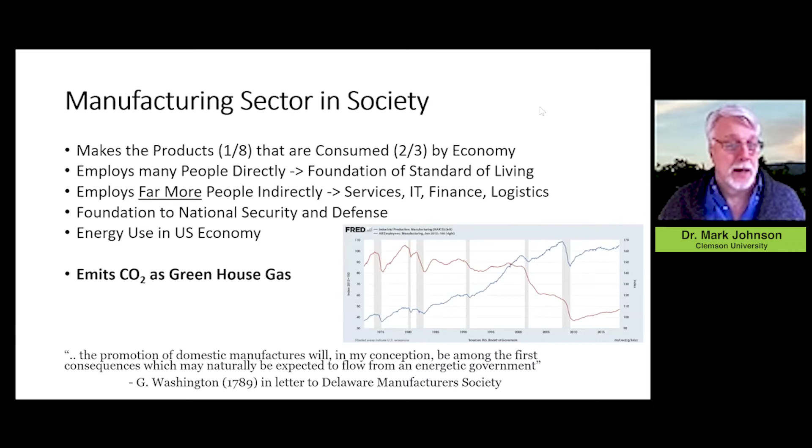So I wanted to talk a little bit about both carbon-free hydrogen and renewable electrification in these high temperature processes. The whole goal is how do we wind up decarbonizing the industrial sector. I thought since we were talking with ITIF here, I'd start with what the conversation around ITIF often is when you're not sitting with the renewable energy community, which is about competitiveness, quite frankly. And so we need to realize that this is a boundary condition for everything we wind up doing here.

First and foremost, if you're working on new technologies for manufacturing, manufacturing is just essential to our economy. Let's start out with that. About an eighth of the US economy is still the manufacturing sector. For anyone that thinks that the US doesn't know how to manufacture things, we are still the second largest manufacturing sector in the world. Our manufacturing sector alone in the United States is larger than all but 6 entire economies in the world. So we actually do a lot of manufacturing here.

It's also what produces the products that wind up being consumed in the other 2/3 of our economy, the products and services there. So the idea that this will just cost a little bit more means that the consumers at Walmart are paying a little bit more. So remember, as we're making these technical trade-offs, that's a boundary condition. It is what it is, it's there.

It also employs many people directly. About 10% of our employment base is directly in the manufacturing sector, and that's the foundation of our standard of living. It actually employs far more people indirectly, both in the services and the IT sector. You think about companies like SAP, whose entire business is supporting the manufacturing sector, right? But they are accounted in the IT sector. Finance, logistics, all of these things get pulled in.

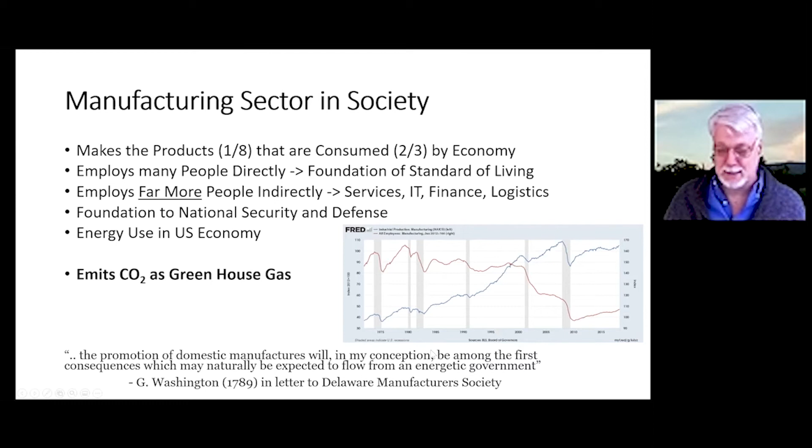Since 1789, presidents with connections to Delaware have been talking about manufacturing. George Washington sent a letter to the Delaware Manufacturers Society saying that domestic manufacturing is one of the first consequences to flow from an energetic government. So government involvement in manufacturing is certainly not new in the United States. So let's take a look at how we're doing on this.

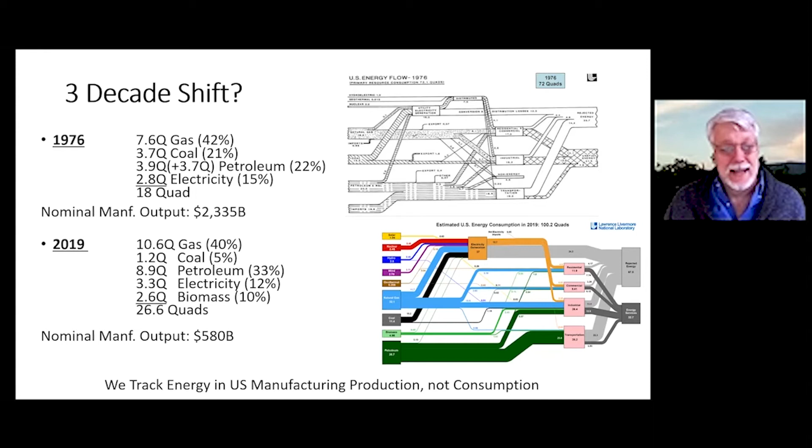This is tracking the energy and the related carbon emissions in manufacturing production in the United States, not the consumption of the products. So don't think that this reflects how we're doing in terms of society. We still have the largest consuming economy out there, and how we wind up buying things affects how things are manufactured. So that's got to be all linked together.

So there's a lot of trade-offs. None of them are really good. This is a classic, what's called a wicked problem. You've got a lot of trade-offs, and this is an area that's ripe for technological innovation, and very aggressive technological innovation. So look at all of the things we could do in the US economy as we're trying to decarbonize the manufacturing sector.

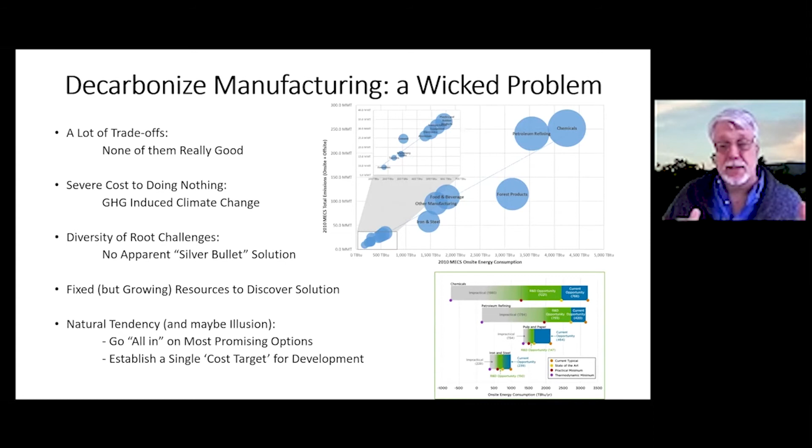I would advise against that, because this is a portfolio problem. There's also no single cost target for development, because each cost and products are at different price points. And as we'll point out in the next slide here, following up on the basic undergraduate economics, if you wind up having an increase in the cost of your supply, you'll actually have a decrease in the demand, always. That'll put someone out of work, by the way. Someone is not going to work doing manufacturing as a result.

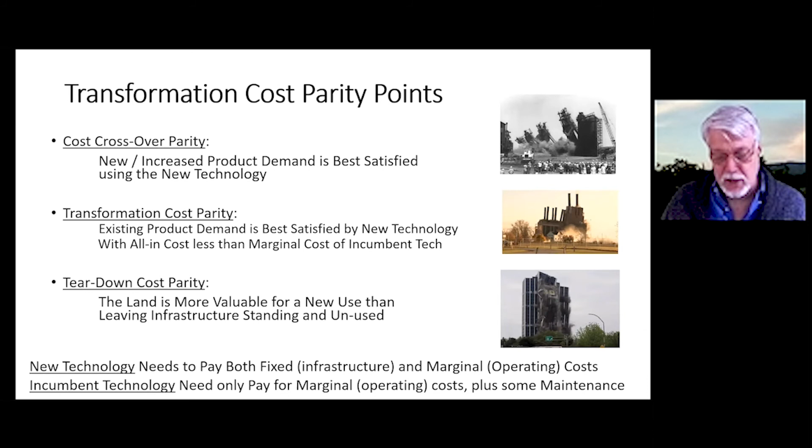And teardown cost parity is literally the point where the new technology is more valuable than the all-in cost of, or the marginal operating cost of the incumbent technology. And in fact, the real estate where you're at is more valuable than having the facility still standing. I show the picture there of last year, Bethlehem Steel's former corporate headquarters being imploded because the real estate was more valuable. So that's even more aggressive as a price you get to. But having that transformational crossover parity is a key point to get to.

Some key reactions to look at on this, some categorizations on it. It's the iron making and steel making, it's the cement production, it's ethylene cracking, and methane steam reforming, if you're looking at hydrogen, is the key one to look at. It's not that high of a temperature relative to some of these others, but it's the basis for all of the other processes, because this is how you take methane and they make hydrogen today at $2 a kilogram or $1.50 a kilogram. So that's the price target you need to get to.

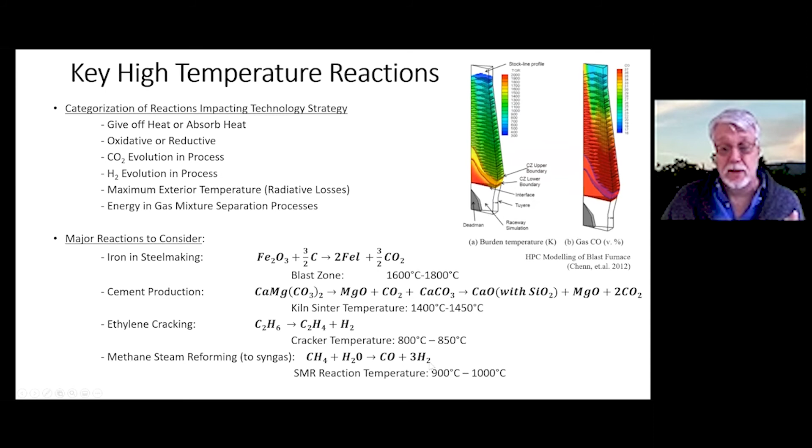By comparison, not only looking at hydrogen, but looking at heat, is what are pathways to clean, sensible heat. Heat is the big amount of energy that goes into the industrial sector. It's a lot of products that are there, but process energy is more than half of the total energy that goes into the manufacturing sector. And from that, fuels for process heat, direct process heat versus cogeneration fuels and things like that for on-site generation, are where your big target is.

So dealing with having fuel converting directly to process heat is the challenge that you'd have. So what's the price target for that? Switching from talking about hydrogen to talking directly to solar, to renewable electrification. The marginal operating cost you're looking for in transforming to renewable electricity, and that is the all-in cost of taking renewable electricity and turning it into heat, is less than the marginal cost of discovering the next little bit of natural gas that's out there.

So what do I mean by that? If you look at the price of natural gas, not the cost, but the price on it, when it gets below about $3.50 or $4 an MBTU, typically the rig count goes down. That's to say that the oil and gas producers can no longer afford to find more natural gas. That is the inherent cost of natural gas, or what the steady state price should be. The price can dip below that because once they've discovered it, they can sell it, right? But don't just follow the price on a daily basis. Follow what's the cost to discover the natural gas that's out there.

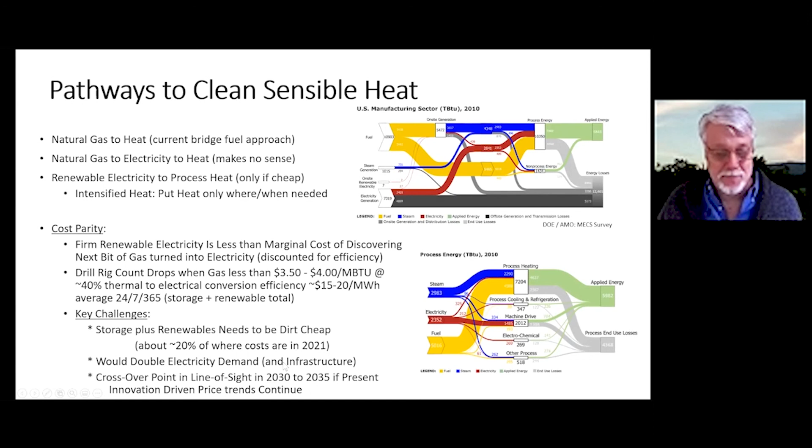The manufacturing sector already knows how to take electricity and turn that into heat. Problem is, how do you get electricity cheap enough? Getting hydrogen cheap enough is another thing. So if you look at the current targets that we have, the recently published industrial uses target for hydrogen is stated at being $1 a kilogram. I completely concur with that $1 a kilogram target, but there's not a lot of specifics on how to get there. And in fact, if you look at the DOE hydrogen program, their 2020 case study gets them down to about $1.77 a kilogram. That's not going to get there.

So in the hydrogen area, if there's one thing I would target, it's saying we need a hydrogen shot, just like a SunShot 10 years ago. Set $1 a kilogram as the target to get that carbon-free hydrogen and decarbonize the manufacturing sector. Until you get to those low prices, both for renewable electricity and for carbon-free hydrogen, you're fighting economics along the way. Don't be afraid of having some aggressive targets out there. Clearly look at why there might be some laws of physics that might limit the ability to get there, but we need an aggressive target and get down to that price point.

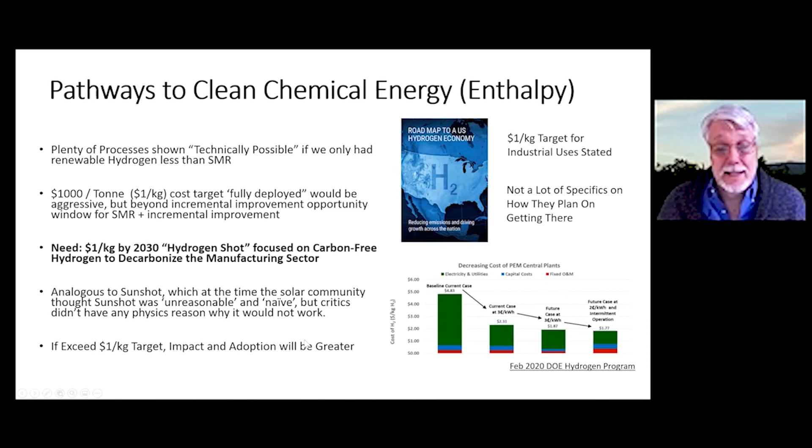So again, this is just a summary here. As I've said, there is no silver bullet, because the manufacturing sector has a lot of stakeholders and a lot of needs that support society. If we want to decarbonize it, we need to be aggressive and really drive those two areas of clean, firm renewables and clean hydrogen at very aggressive cost targets.